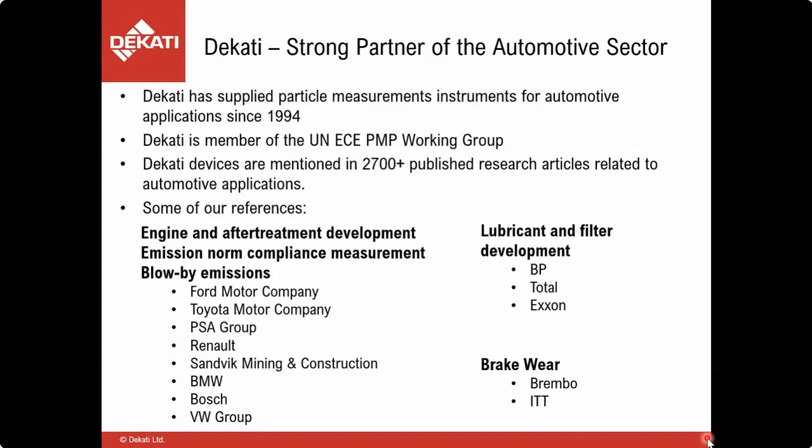We have supplied to companies such as Ford, Toyota, Peugeot, Renault, Sandvik Mining & Construction, BMW, Bosch, Volkswagen Group, and many more. Also related to engine development, for instance, lubricant and filter development, we have supplied devices to BP, Total, Exxon. More recently, when brake wear measurements have become more important, we have been working together with companies such as Brembo and ITT. So we can look back at a very broad established customer base. So moving forward,

we want to show you two graphs showing the relative amount or contribution of several automotive emission sources. There are, of course, the traditional emission sources like diesel and petrol emissions. Here in the left graph, we can see that. But then at the lower end, we see there's brake wear, road abrasion, tire wear, and road transport resuspension. This is for England, of course, but it's a general trend.

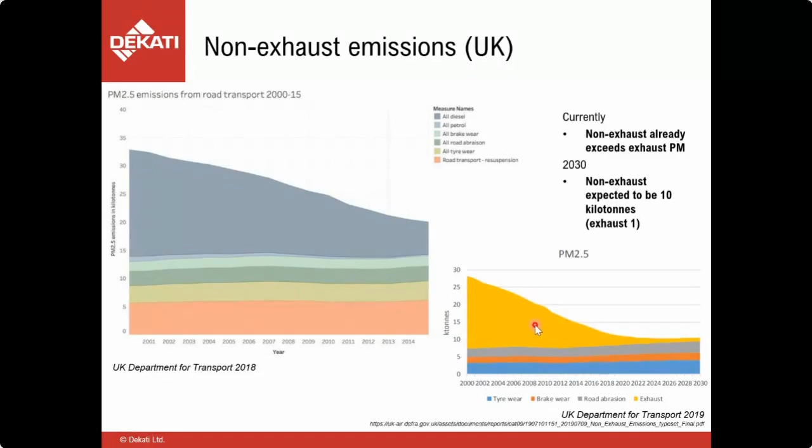So we see a steep decline in engine emissions, but at the same time, non-engine sources such as brake and tire are becoming relatively more important. The graph at the right basically shows the same trend. And just extrapolating to the future, it's clear that non-engine emissions and non-engine emission measurements will become relatively more important in the near future. So then first, we'll look at the solutions that Dekati offers for engine exhaust emissions.

So we can distinguish two big groups in our users, and there are, let's say, compliance measurements, which means users who use our equipment for testing to check whether engine emissions are compliant with certain emission standards.

And at the other side, there are non-compliant setups, and these are setups that are more used for R&D purposes. So, as we show here, for instance, for engine development and optimization, or for after-treatment system development and optimization. We have different setups for the non-compliant, and we'll get back to the compliant later on.

But starting with the non-compliant setup, we have 5 big groups. The first one is the pre-after treatment system, where we measure particles directly after the engine. Then we have post-after treatment system, which measures particles after the after treatment system. And of course, if we combine these both, we can check system performance of the after treatment system itself, so before and post after treatment.

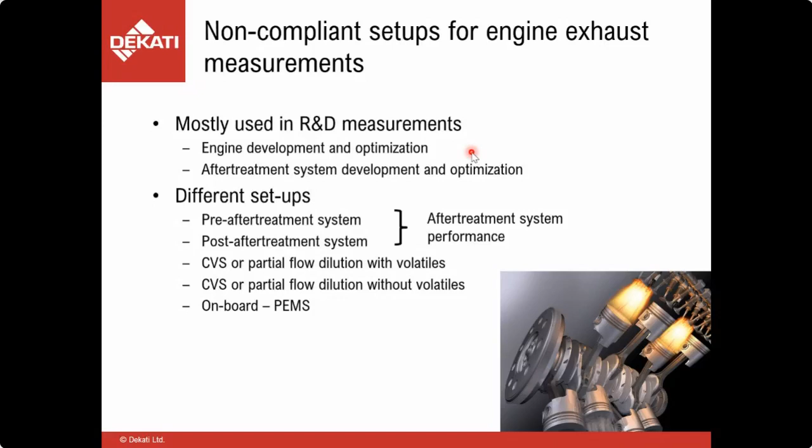So our main, let's say, instrument, the ELPI+, which has been around as long as Dekati, so for more than 25 years in various versions, is a really good all-around R&D instrument, especially for vehicle exhaust measurements, and that's why we want to highlight it here in particular. The ELPI+ and its variants make it possible to give a very clear indication about size distribution, either in terms of mass or particle number.

In the heated, high temperature version, the ELPI+ can also be used to measure exhaust directly from the tailpipe without dilution, and so far it's the only instrument capable of that. Since the ELPI+ can measure down to 6 nanometers, it's also an instrument that's suitable for the future. So it's really suitable as a long-term investment, since even if future regulation would go down from 23 nanometers to 10, the ELPI+ is ready to cover that.

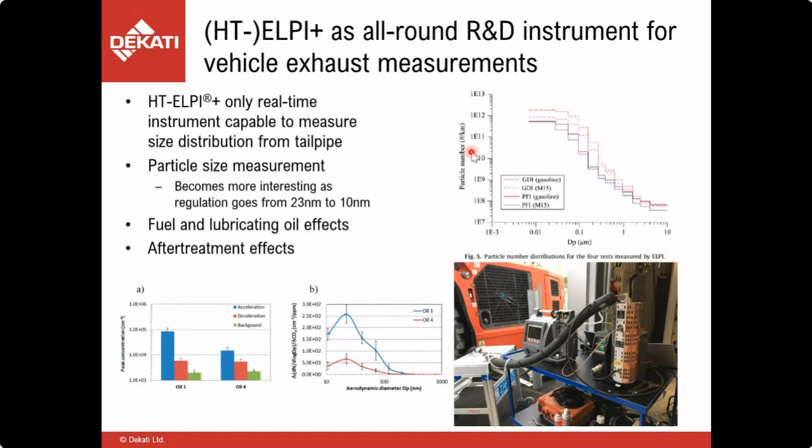So back to the different setups that we offer for the non-compliance measurement. The first that we want to highlight here is pre-after treatment, directly from the engine. After the engine, we typically have very high pressures, high temperatures, and high particle concentrations. For that purpose, we have this combination setup in which our DEED-300 acts as a pre-dilution system, and it's also used to cope with the high pressure fluctuations that we see post-engine.

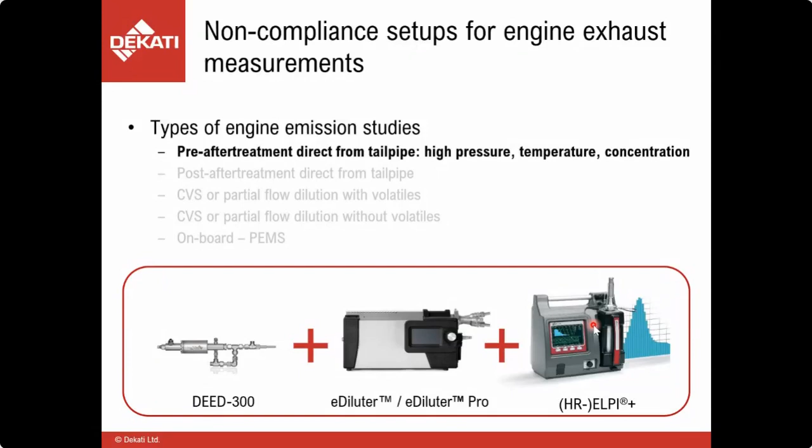So the DEED-300 is combined with our dilution system, the E-diluter, or its more advanced version, the E-diluter Pro. The E-diluter will do the dual stage dilution: first hot dilution followed by cold dilution to reduce the sample temperature to close to ambient, making it suitable for measurement by the ELPI+. In this case, again, ELPI+ is the preferred instrument, which is also available in a high resolution version. The high resolution version gives a more detailed size distribution than the standard ELPI+, but both instruments can be used depending on the purpose.

So if we move on from the engine to the after treatment, now we are post after treatment. Here, of course, we already have lower pressures in the exhaust system. Also, the temperature is slightly lower, and the concentrations are specifically lower since we are measuring post after treatment, so a lot of the particles have been trapped in the after treatment system. For this purpose, we have basically two options to offer.

The first one is the high temperature ELPI+, which, as I said earlier, can be used for direct measurement of the hot exhaust gas without dilution. A high temperature ELPI+ can handle temperatures of up to 200 degrees C, which is suitable for most post-after treatment measurements. Or alternatively, since we don't have the high pressures anymore, we can leave off the DEED-300, which we had before the after treatment system. In this case, the combination of eDiluter with ELPI+ is certainly suitable.

Then moving forward, we are at the tailpipe. If we do either constant volume sampling or partial flow dilution sampling, we have two possibilities, the same as we have seen earlier. Either we use the high temperature ELPI+, or the combination setup with eDiluter and the ELPI+. What we can do here is that if we want to measure with volatiles, we can switch off the heating of the ELPI+ and measure, let's say, cold.

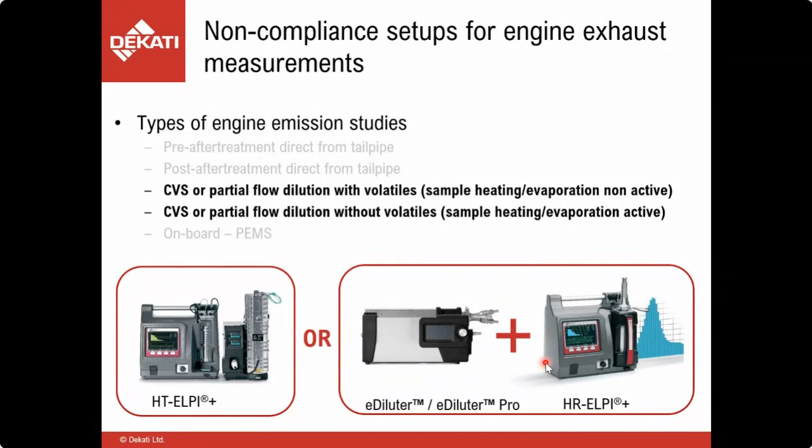Then the last word for non-compliance setups is about onboard PEMS measurements. So again, here we can use the high temperature ELPI+ for direct measurement at the tailpipe, or, and that's already a more compliant setup, if we want to have a compliant setup for RDE purposes, we can use the setup that's shown here, which has basically a pre-dilution, let's say catalytic stripper and a heated probe, combined then with, for instance, a particle number counter system. So these are different setups that we have available for non-compliance measurements.

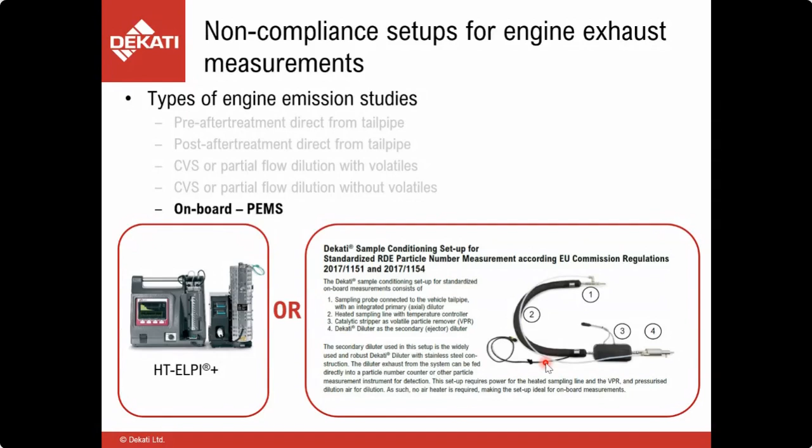If we look more at the particle mass measurements, one instrument that's been used for that purpose is our Dekati eFilter, which is basically a standardized gravimetric filter holder combined with a real-time measurement module. So we have the gravimetric filter that collects the particle mass on the filter, at the same time combined with a real-time module, which allows to monitor the measurement in real time. And these instruments are used a lot in the States, where there's still a lot of particle mass standards, but also in other parts of the world where, for one reason or another, particle mass is

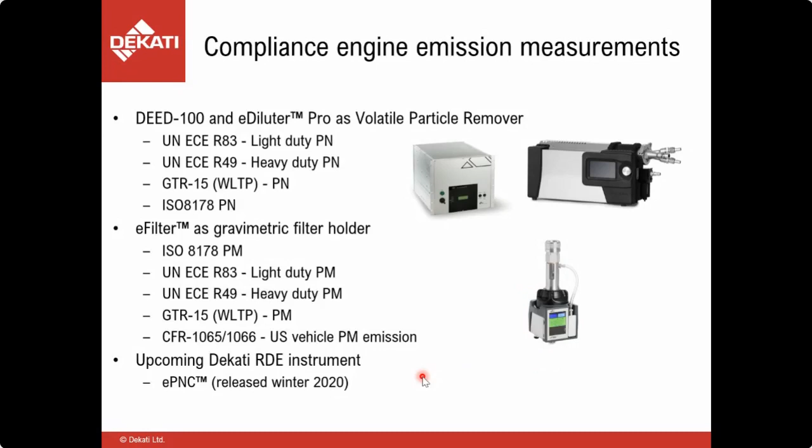the preferred measurement method. Then soon to be released, not yet here, is a new RDE instrument, the Dekati ePNC. So it's a kind of first mentioning of this instrument. We will release this later this year, and you will certainly see more about that later on. So that was an overview of the engine emissions, and now Oskari will continue with the blow-by gas emissions.

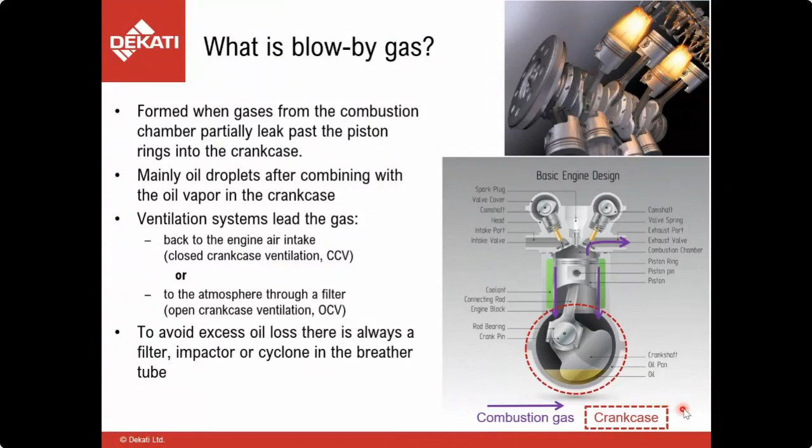So let's start by briefly introducing what is defined to be the blow-by gas, which might be very familiar to many of you, but let's go through it quickly. Blow-by gas is formed when gases from the combustion chamber leak around the piston rings. As you can see here, it's a very basic image of a combustion engine design. The combustion happens here in this chamber, and most of the exhaust exits through the exhaust valve, but the piston and the piston rings are not completely leak proof, which causes some of that combustion gas always to go into the crankcase. And in the crankcase you have the crankshaft rolling, and there's the oil sump at the bottom.

And obviously when you have some of the combustion gas entering the crankcase, there has to be some way to also let it out. So basically it is let out via a breather tube. And there are a couple of ways to deal with that. Blow-by gas, which is the gas that enters first from the combustion chamber into the crankcase, and from there on forward, is mainly oil droplets, because there is a lot of oil and oil mist inside the crankcase. So when it combines with the oil vapors in the crankcase, it consists of mainly oil droplets. And as I mentioned, there is a breather tube going out of the crankcase, and there are two basic ways to lead the gas out.

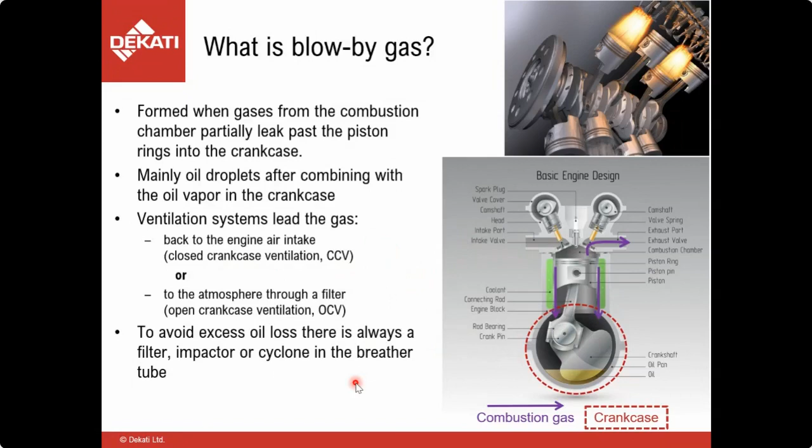And in terms of particles, the blow-by gas has a very wide particle size range, because it has the oil droplets in it, but then it also has the soot particles coming from the combustion gas. Concentrations before separation or filtration are high. Mass is counted in milligrams per cubic meter. Temperature is around 80 to 100 degrees, and the pressure is slightly elevated, but not too much, usually in the sample inlet zone in these measurements.

Concentration range is also quite wide, because this application is usually about studying the filtration efficiency. So there have to be measurements before and after the filtration to find out the size distribution in both cases. And these properties promote the application definitely for the high temperature ELPI+, because it enables the measurement from the high temperature without any dilution, also if the filtration is very efficient and the concentration after the filtration is low.

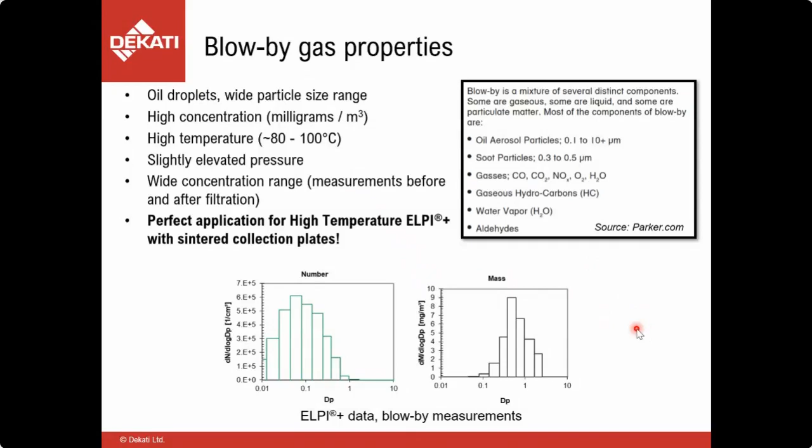So basically, it is not just a straightforward thing that you just want to find out how well the filter works just to make better filters by themselves, but there are different types of aims with these studies being done with the ELPI+ units around the world.

So when developing these closed crankcase ventilation systems, where the blow-by gas is being led back to the engine intake, the filtration is very, very vital, because when there's a turbocharger and intercooler involved, the modern turbochargers are very delicate and they cannot withstand a lot of dirt or oil. So the filtration has to be super efficient in order to prevent the turbocharger from breaking down under the burden in these closed crankcase ventilation systems.

And then with the open crankcase ventilation, where the blow-by gas is not being led back to the engine intake, it is still very important to have good filtration, because these blow-by gas emissions are contributing to the regulated limits of the vehicle legislation. So even though the exhaust gas going through the main exhaust valve is treated very carefully, if they don't filter these blow-by gases well enough, they can fail to fulfill the limits for PN or PM, depending on the regulation.

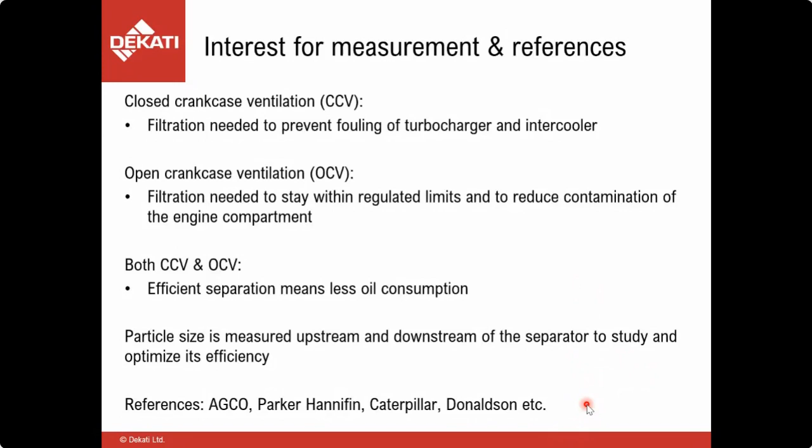And there is also a standard for these blow-by gas filtration systems, and the ELPI Plus is a solution that fulfills the requirements of this standard, which is also one reason why so many customers in this field are using it. The standard states that the particle counters can be optical particle counters, but also other counters demonstrating good correlation, such as aerodynamic particle counters. And ELPI Plus size segregates the particles by their aerodynamic size. Also, the size range that has to be covered is 0.5 microns to 10 microns in aerodynamic size. And the standard actually states that the technical advantages of using aerodynamic particle counters are well recognized.

So in the past, the measurements in this field were done with optical particle counters, but it has become more and more clear that aerodynamic size distribution measurement has some major benefits over the optical ones, which can be definitely seen from this picture, for example. There's the capability to measure down to much smaller particle sizes compared to optical instruments. In these graphs, there are two example size distributions. These are actual ELPI Plus data, mass size distribution and number size distribution from blow-by gas measurements.

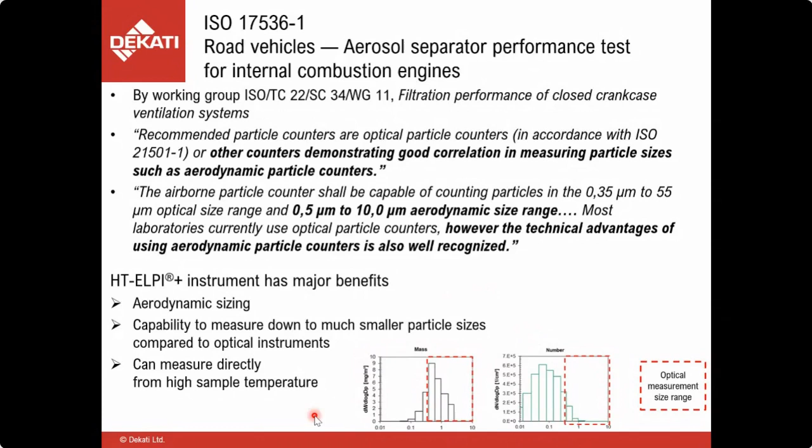And to wrap up the blow-by emission measurements, here is the most usual setup that we have provided for these measurements. So it's a high temperature ELPI Plus, which was already also shown by Peter, and it can be then combined with one heated Dekati diluter, because in some cases it needs a bit reduction in the concentration when measuring upstream of a filter.

So this can then take the sample at desired temperature, usually around 80 degrees Celsius, and with the sintered collection plates compared to the smooth ones, you can do very long measurements without any need to clean the instrument, because this can collect a lot more particle matter compared to the smooth analysis plates.

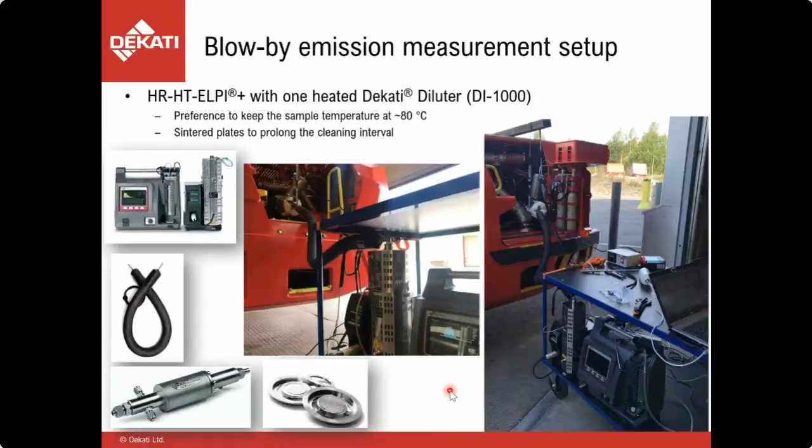Okay, I will then continue with covering one other topic. This is then a non-exhaust application, the brake wear emissions. As you know, and as was mentioned by Peter, engine exhaust emissions are already quite widely regulated, but for brake wear emissions, the first emission regulations are being prepared now, and probably will be published in about 1 year from now. They are still being processed, but what we already know, and what is the reason for these regulations, is that the brake wear emission PM corresponds to about 10 times the tailpipe emissions from a modern vehicle.

The process how the brake wear particle emissions are formed is a complex process. The materials are very complex in the brake wear industry, and the test conditions and aging of brakes have a lot of effect on the emissions as well. So there are a lot of different kinds of variables, and the ELPI+ instrument family is ideal for these measurements, because the brake wear particles have a very wide size range.

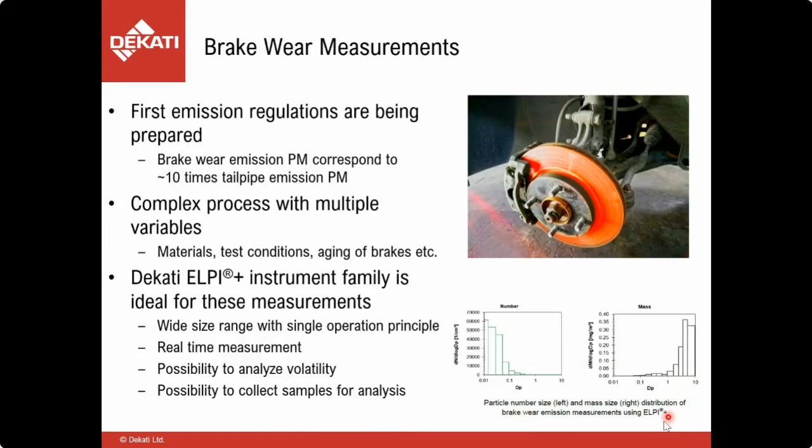And here's one example setup and some data about the measurements we did with a brake manufacturer ITT in Italy. So they had this brake dyno. Not all the details of the brake dyno are regulated yet, but basically the principle is always the same. There is filtered clean air going through the dyno, and then there's the brake rotor, the brake assembly here, and the clean air is being led through the braking rotor and then into this channel, and there is isokinetic sampling in the channel, and that sample after the isokinetic probe then goes to the measurement instruments.

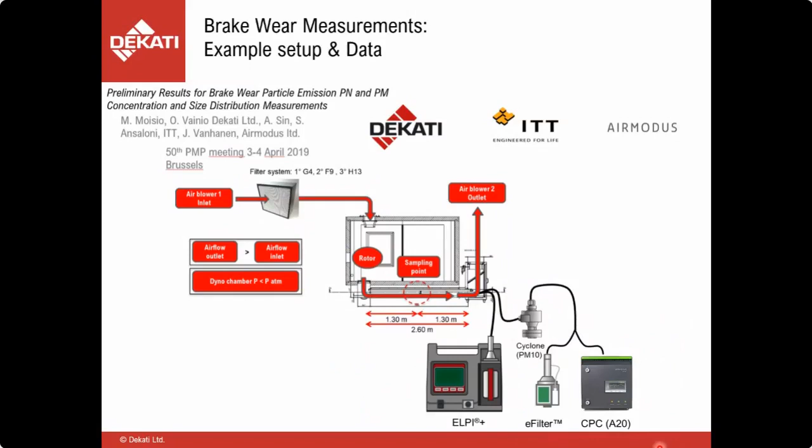Here we had ELPI+, and then we had E-filter, and then we had a CPC condensation particle counter to get some comparison data between these instruments. CPC was by Airmodus, and a cyclone was used to cut the over 10 micron particles. Here's one photo of the setup, including the E-filter and the ELPI+.

And the first graph here shows the ELPI+ concentration with the blue line, CPC number concentration on the orange line. Brake events are the step functions shown with the gray line, and the E-filter current reading is shown with the yellow line. So we were able to see these braking events with each of the instruments, and the ELPI+ and CPC number concentration correlated well. Also, the brake temperature can be seen here in the graph on the red line.

Here's another graph from the same measurement showing also the number and mass size distribution gathered with the ELPI+.

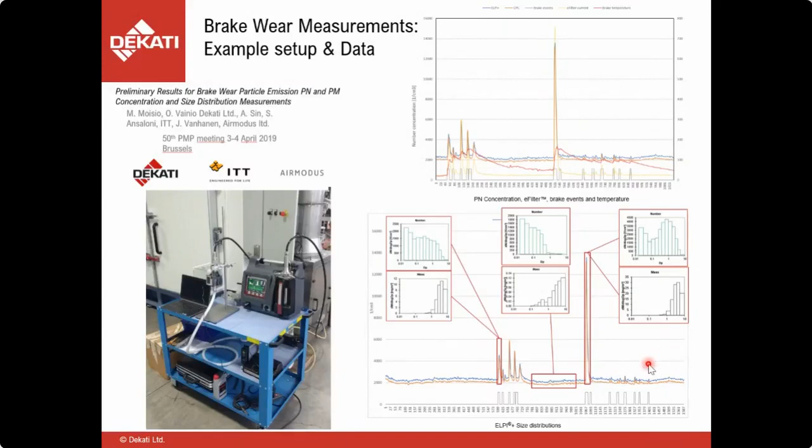Okay, thank you, Oskari. And then the last point that we want to cover today are tire wear emissions. So again, one in the non-engine emission category. So as Oskari mentioned, brake wear has got a lot of attention in recent years, to the point that there are now common standards for brake wear measurements. And going forward, we see that the next step in automotive particle measurements will definitely be tire wear measurements.

So as I've shown you in the first slide of the presentation, tire wear is also a big contributor to total vehicle particle emissions, and we see now that there's interest from, say, tire manufacturers to look into this matter, and also from the lawmakers' side. We see that there are initiatives taken to move toward standards for tire wear emission measurements and also tire wear emission limits.

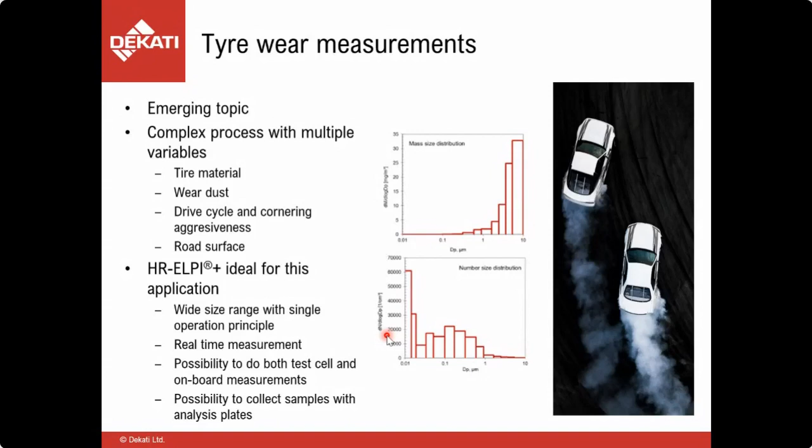The fact that the ELPI+ can also collect the material that's generated in the tire wear process is very important, because we need to afterwards determine the amount of matter that's generated by the tire itself and that's generated by the road surface.

So onboard testing, is it feasible? And why do we want to talk about onboard testing? At this phase, as usual in a development process, the first step towards a standard for tire wear emissions is that we think the ultimate goal is to have a bench test. But before we can set up a bench test, we have to define a correlation between what's happening on the road and try to simulate it on the bench.

So the first step, where a lot of activities are going on now, is to do onboard, real driving testing, to see what kind of emissions are generated by tires when driving on the road. So here, as I said, the ELPI+ is the ideal instrument. We have the real-time data, and we also have the analysis of the collected material, so we can define what part of the emissions comes from the road and what comes from the tire.

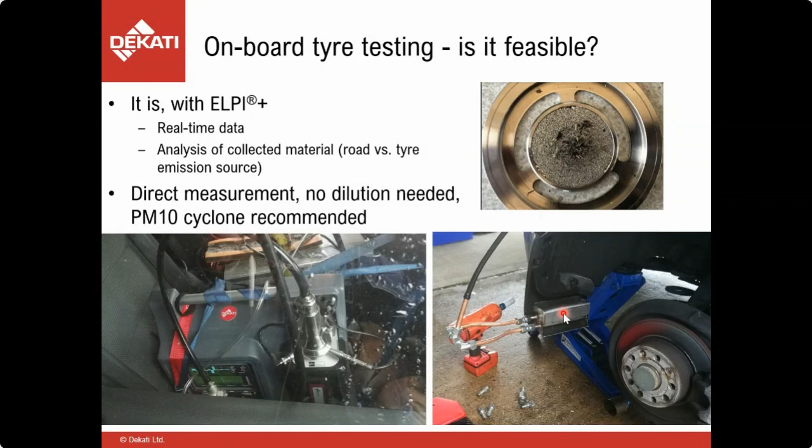We have been participating ourselves in some first trials in onboard tire testing, where we had, in the picture on the left here, the ELPI+ with a pump inside, so a pump ELPI+, which takes a sample via a collection mechanism that's just behind the tire. So during the driving, we can collect material and see the different dynamic patterns, which is shown on the following slide.

So in this trial, we had a car driven by professional test drivers on a closed track. And because this was a first trial, the aim was to generate as much emissions as possible by driving as fast or harsh as possible. So on the test track they did two 50-minute runs, which was about 10 laps. The tires were weighed before and after each run. The weight loss per kilometer was 5.8 grams. Of course, this was driving on the edge, but still.

Then new data even suggests that premium tires can emit significant amounts of particles, even during normal driving and cornering. During this trial, also because for us it was the first time to use the ELPI+ in this configuration, we looked at how repeatable the data are and found very repeatable data between different runs.

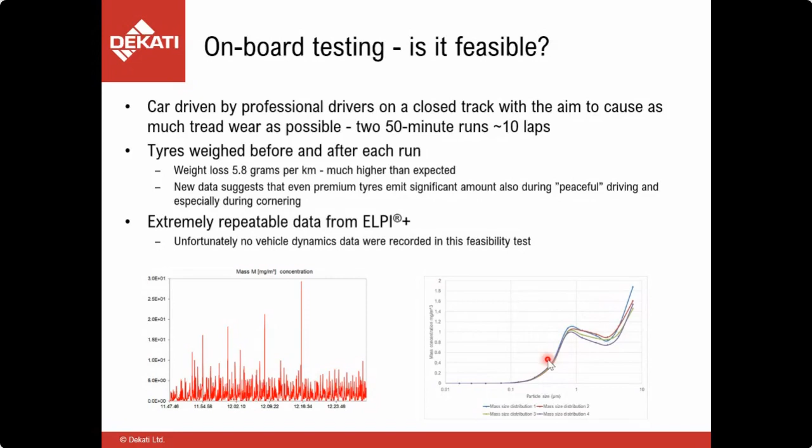So well, that was our presentation. I hope we have given you a good and broad overview of what's possible using Dekati instruments in the automotive industry, and we'll be happy to answer a few questions.

Peter, there is a question from Mr. Sachin. He is asking, is it possible to collect samples for chemical analysis? Yes, that's certainly possible. The ELPI+ has different size fractions where we collect particles in different sizes. We do the particle collections on special analysis plates. After the measurement, these plates can be taken off and the material collected for various kinds of microscopic or electron microscopic research or analysis.

Okay. Are there any options in these plates? In the presentation you discussed the sinter plate. So we have basically two types of plates. We have our standard analysis plates, which make it possible to do chemical or microscopical analysis later on. They collect the material in a way that's easy for further analysis. And on the other side, we have our sintered collection plates, which are more used for applications where we want to measure a long time, but without the need for later analysis. So that's the basic difference.